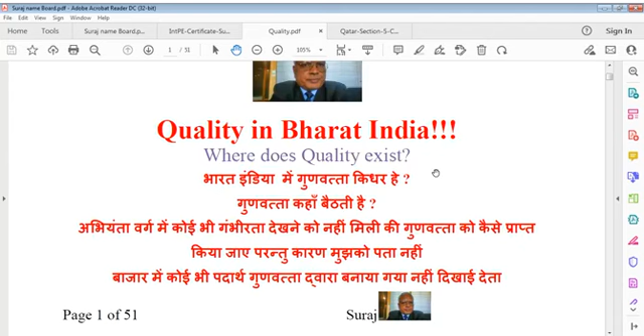There's only certification - you can say I'm certified when I certify my product, but even your certification doesn't have value because what you say doesn't work. Performance is more important in the engineering world, and if you don't perform, you are not suitable for this job.

We generally recruit you based on your interview or examination, and then we observe your performance. If performance comes up to the mark, then we will regularize you, or keep you on contract for just 1, 2, 3, or 4 months. This probation is required, and you have to pass through it.

Whatever times you join a job, you may change jobs, and even with experience, your performance is very important - that's the criteria that's fixed. If your performance is to be observed, the performance of the product is also to be observed. And that's why I say performance matters.

It may be personal performance - an officer's performance, a manager's performance, an MD's performance, an engineer's or doctor's performance. Whatever performance is required, that's very important. Same with product performance - if the product does not perform, that is shameful.

We only keep ourselves under the cover of warranty. I don't respect warranty if it's only for namesake or for the seller's own protection - that okay, you have 1 or 2 years warranty and I'll help you. If I help you, it's your responsibility to replace or repair it. Why should something fail without successful performance?

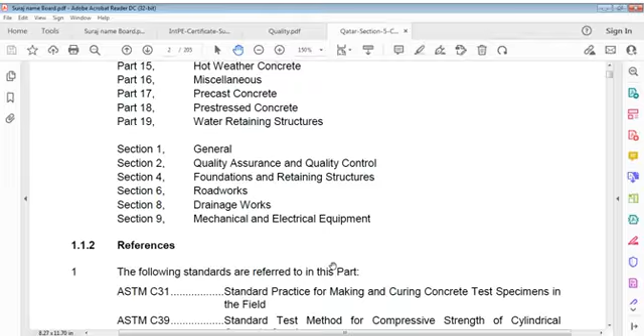Foundations and retaining structures, roadworks, drainage works, mechanical and electrical, includes requirements of concrete work for pipelines, roadworks, runways, structures. This is general, part 1 general. So likewise we can see section 1 is general, and then we have many references we have gone through, lots of references.

I will not go through scanning each page, but we can say if you scan through the whole document, you will find lots that we have gone through. It's not complete, it's just some references.

Now last time what I was interested in, I took many files from the internet to understand what we have to do, how we have to do concrete in certain weather conditions. That's a point where we have to understand clearly, because concrete is a very important item. It's such an important item that even very experienced people don't understand concrete sometimes.

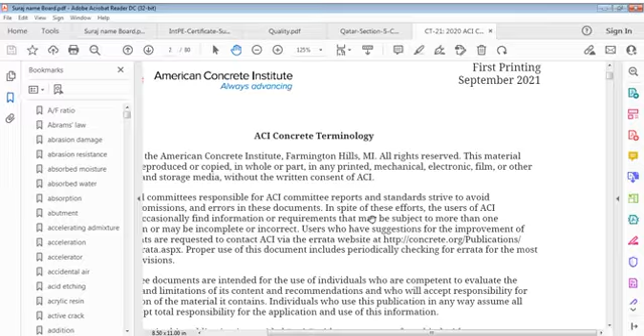Tries to avoid ambiguities, omissions and errors in these documents. In spite of these efforts, users of ACI documents occasionally find information or requirements that may be subject to more than one interpretation or may be incomplete or incorrect. Users who have suggestions for improvement of ACI documents are requested to contact ACI.

This is ACI committee material, just for information which I'm referring to, because I cannot hide something when I use this. So this is that file, on behalf of American Concrete Institute - American Concrete Institute Concrete Terminology, ACI CT21. In this, various definitions are given.

Abrams' law: a rule stating that with given concrete materials and conditions of test, ratio of amount of water to amount of cement in mixture determines strength of concrete, provided mixture is of a workable consistency. It's called water cement ratio, as we know, but it's the prime slide.

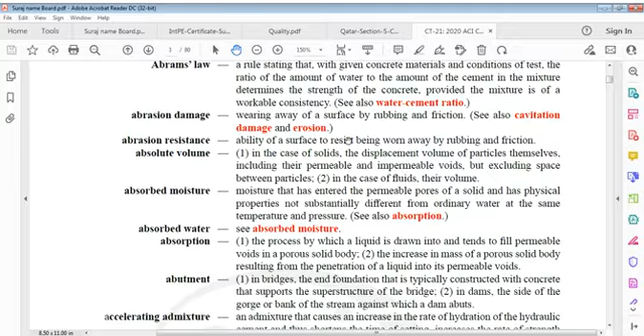Similarly, abrasion damage: wearing away of a surface by rubbing and friction, and it's called abrasion damage.

Same way, abrasion resistance - I'm just giving references, just to let you know what I have planned to talk about. Abrasion resistance is ability of a surface to resist being worn away by rubbing and friction.

So one was damage and one is resistance. Damage is, for example, wearing away of a surface by rubbing and friction, and resistance is the ability of a surface to resist being worn away by rubbing and friction.

Absolute volume: in case of solids, displacement volume of particles themselves, including their permeable and impermeable voids, but excluding space between particles. In case of fluids, their volume.

So likewise we have to know: absorbed moisture, absorbed water, absorption, accidental air, acid etching, acrylic resin, active crack, addition, adhesion, adhesives, and you can say adiabatic, admixture, adsorbed water.

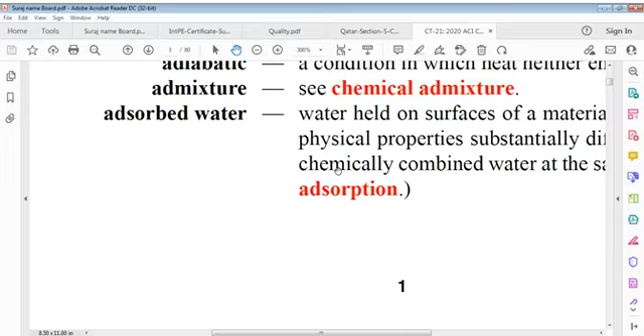Airlift, air meter, air ring, air separator, air voids, air blown mortar, air-cooled blast-furnace slag, air permeability test, air water jet, alignment, alkali, alkali reactivity of aggregate, alkali aggregate reaction, alkali carbonate rock reaction.

Alkali silica reaction, alkyl aryl sulfonate, allowable bearing capacity, allowable live load, allowable stress, alternative cement, alumina, aluminate cement, aluminate concrete, aluminous cement, amount of mixing, amplitude, anchor bolt.

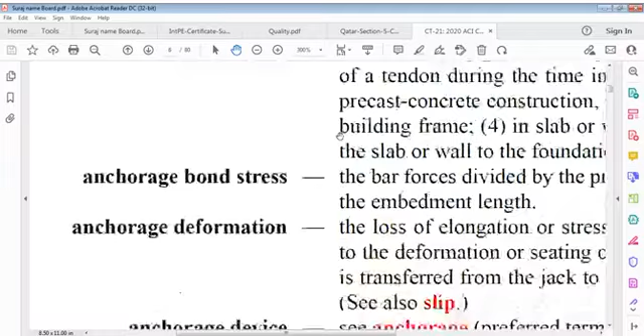Anchorage bond stress, anchorage deformation, anchorage devices, anchorage loss, anchorage slip, anchorage zone, angle of repose.

Calcium chloride, CaCl2, anti-washout mixture, apparent specific gravity, arc spectrography, architect engineer, architectural concrete, area of steel.

Arrhenius, argillaceous, arris, arrissing tool, artificial pozzolan, asbestos cement products, ashlar masonry, asphalt cement, asphaltic concrete, atmospheric pressure steam curing, autoclave curing, autoclave cycle.

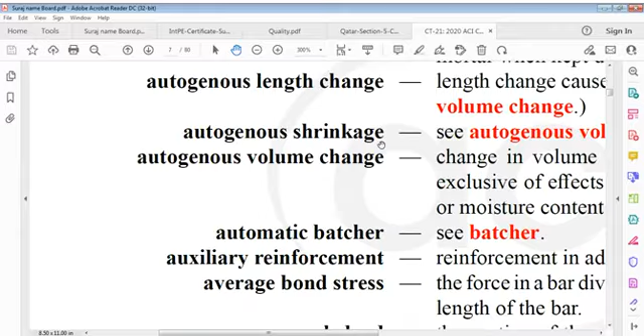Autoclave aerated concrete, autoclaving, autogenous healing, autogenous length change, autogenous shrinkage, autogenous volume change, automatic batcher, auxiliary reinforcement, average bond stress, axial load, axial steel reinforcement, back form, back plastering, backstay, backfill concrete.

Balanced moment, balanced reinforcement, ball mill, ball test, bar bender, bar mat, bar schedule, bar spacing, bar support, bar chair, barite, barrel of cement, base, base bead, base coat, base course, base plate, base screed, basic creep, basanite, batch mixer.

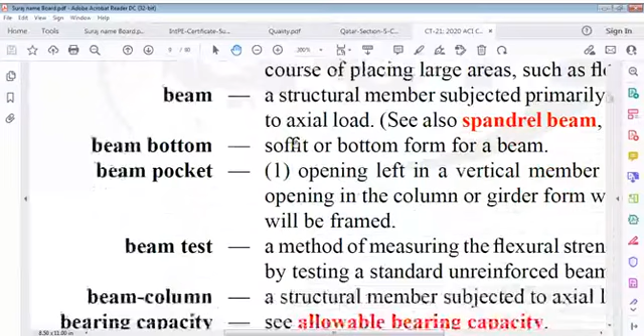Batch plant, batch weight, batch to water, batcher, batten, batter pile, bauxite, bay, beam bottom, beam pocket, beam test, beam column, bearing capacity, bearing stratum, belite, bend bar, bending moment, bending moment diagram, bending fractions, bentonite, billet.

Blaine apparatus, Blaine fineness, Blaine test, blast furnace slag, and likewise we have bleeding capacity, blast furnace.

Oh no, something has gone wrong. I'm sorry, I pressed the wrong button here. Sorry, something went wrong. Excuse me for that, I was on B.

So I came back to here. It's base course, basic plate, base screed, basic creep, basanite, batch mixer, batching plant, batch weight, batch washer, batchers, batten

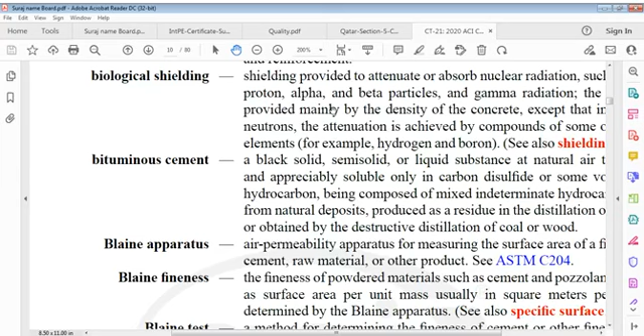Pile. So I came back here, and he says bentonite, billet, steel binary mixture binder, biological shielding, bituminous cement, Blaine apparatus, Blaine fineness, Blaine test, blast furnace slag, bleeding capacity, bleeding rate, blemish, blended cement, blinding

Bleeding rate, blemish, blended cement, blinding, blistering, block beam, block out, blow holes, blow pipes, blow up, board butt joint, bond sleeve, bond area, bond breaker, bond length, bond plaster, bond prevention, bond length, bond stress, bonded hollow wall masonry, bonded member

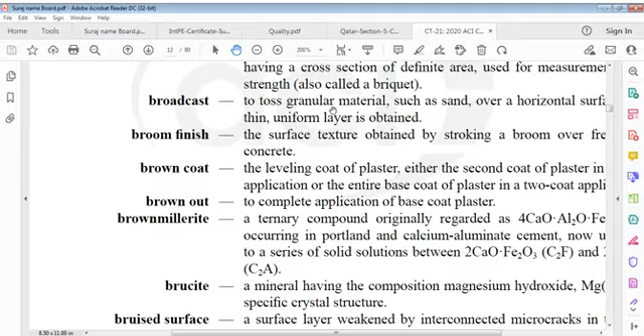Bonded post tensioning, bonded tendon, bonding agent, bonded member, bond with post tensioning, bonded tendon, bonding agent, bonding layer, bored pile, boring, boron pits, boron loaded concrete, box out bracing, bracket, bridge, brick seats, bridge deck, briquette, broadcast, broom finish, brown coat, brown out, brownmillerite

Bruised surface, buckling, bug holes, buggy, building official, build up, bulk cement, bulk density, bulk specific gravity, bulk head, bulking factor, bull float, bundle

Bush hammer, butt joint, buttress, butyl stearate, and cable, cage, cation, calcareous, calcite, calcium sulfo aluminate cement, very important point, calcium sulfo aluminate cement, calcium chloride solution, calcium hydroxide, calcium stearate, calcium aluminate cement, calcium silicate brick, calcium silicate hydrate, calation, California bearing ratio, calorimeter

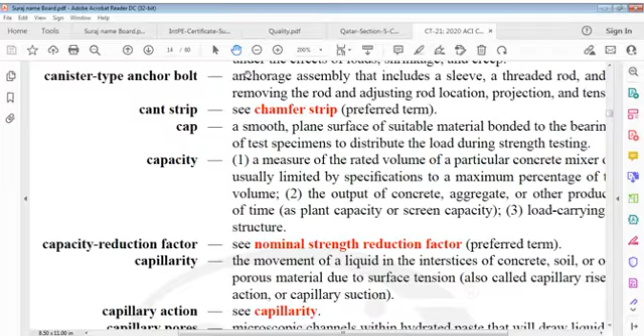Camber, canister type anchor bolt, cant strip cap, capacity reduction factor, capillary action, capillary pores, capillary rise, capillary suction, carbon black, carbonation shrinkage, cast stone, castable refractory, cast in place concrete, cast in situ

Cathode, cathodic protection, caulk, cavitation damage, celite, and we can say cast in situ, cathode, cathodic protection, caulk, cavitation damage, celite, cellular concrete, cellular construction

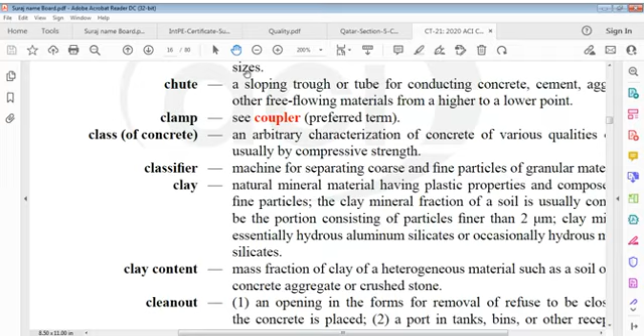Cementitious material, cementitious mixture, centering, central mixer, central mixed concrete, centrifugal process, centrifugally cast concrete, ceramic bond, chair, chalk, chalking, chamfer strip, charge, checking, chemical admixture, chemical attack of concrete, chemical bond, chemically pre-stressing cement, chaff, chipping, chips, chute, clamp, class of concrete, classifier, clay content, clean out, clean up, cleat, climbing form

Clinker, check clip, coarse aggregate factor, cleat, climbing form, kicker, coarse factor, and then coarse grained soil, coated bar, coating, cobble stone, coefficient of permeability to water, coefficient of subgrade friction, coefficient of subgrade reaction, coefficient of thermal expansion, coefficient of variation, cold joint, then cold strength, cold weather, cold drawn wire reinforcement, and you can say cold joint lines

Cold joint steel reinforcement, colemanite, collated fiber, colloidal grout, colloidal mixer. Then you can say cold joint lines, colloidal mixer, and then you have color hardener, colorimetric

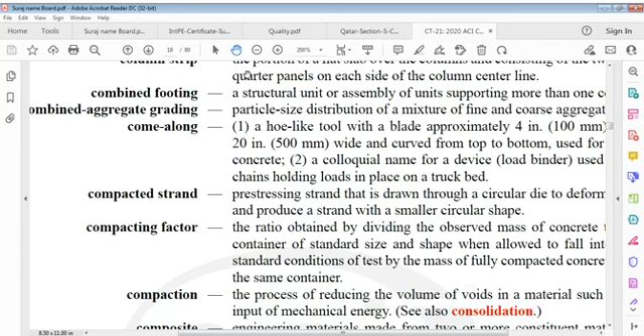Value, column capital, column clamp, column side, column strip, combined footing, combined aggregate grading, come along, compacted strand, compacting factor, compaction, composite column, concrete flexure member, composite construction, composite

It is composite concrete flexural member, that is composite construction, composite pile, composite sample, compression member, compression reinforcement, compression test, concentric tendons, concordant tendon, concrete block, concrete breakout failure, and you can say concrete brick, concrete cart, concrete compressive strength

Concrete containment structure, concrete cover, concrete finishing machine, and you can say here is also concrete die, which concrete die, concrete finishing machine, concrete flat work, concrete masonry unit, CMU we call it, concrete paver, concrete pile, concrete producer, and we can say here concrete pry-out strength, concrete pump, concrete reactor vessel, concrete spreader, concrete strength, concrete vibrating machine, condensed silica fumes

Cone bolt, confined concrete, confined region, consistency factor, consistometer, consolidation, consistency factor, and we can say consistometer

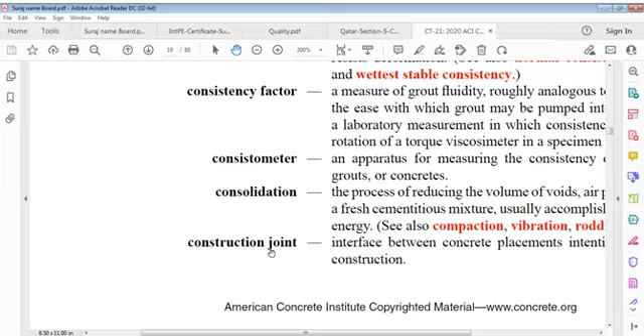Consolidation, construction joint, and also we can say here, let me check, it's yes, working, still working. So consolidation, construction joint, there is

Construction loads, contact ceiling, contact pressure, contact splice, containment structures, continuous beam, continuous grading, continuous mixer, continuous mixing, continuous sampling, continuous slab beam, continuously reinforced pavement, contract documents, contraction joint

Grouting, contractor, control joints, and you can say conveying hose, conveyor, coping, corbel

Core, and you can say core beam, coring, corner reinforcement, corrosion inhibitor, cotton mats, coupler, coupling agent, coupling sleeve, course, crack, crack control reinforcement, cracked section

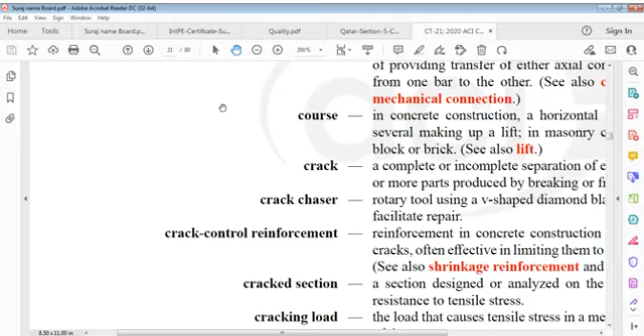Cracked section, and you can say cracking load, cracks, crazing, creep, critical saturation, cross bracing, cross section, and we can say cross plate, crushed gravel, crushed stone, crusher run aggregate, cube strength

Cumulative batching, curing agent, curing blanket, curing compound, curing cycle, curing delay, curing kiln, curing membrane, curling, curtain grouting, curvature friction, cutting screed, cuttings, and we can say here cylinder strength, damage, dampproofing

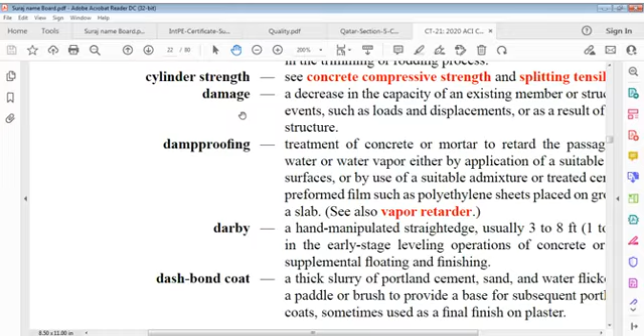Dash-bond coat, darby, D-cracking, dead-end anchorage, dead man, debonding, decentering, decking, decorating concrete, deflected tendons, deflection, deformation, deformed bar, deformed reinforcement, deformed tie bar, dehydration, deicer.

Delamination, delayed ettringite formation, delivery hose, demold, demold dense graded aggregate, and densifier.

Density dry, density control, design bearing pressure, design load, design strength, detailing, deterioration, development bond length, bond stress, development length, devil's float, diagonal cracking, diagonal tension, diametral compression test.

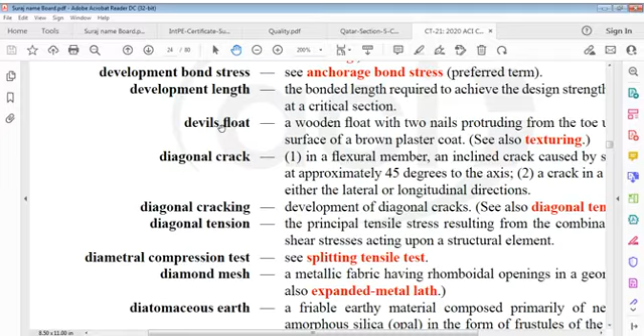Diamond mesh, diatomaceous earth, dicalcium silicate, differential thermal analysis, diffusion, dilation, direct dumping, discoloration.

Disintegration, dispersing agent, distortion, distress, distribution bar reinforcement, D-line cracks.

Dome, dormant crack, double T-beam, double up, dowel rod, double bar reinforcement, drainage fill, drape tendon, dryer, drilled pier, drilled pile, drilled caisson, drip, drop panel.

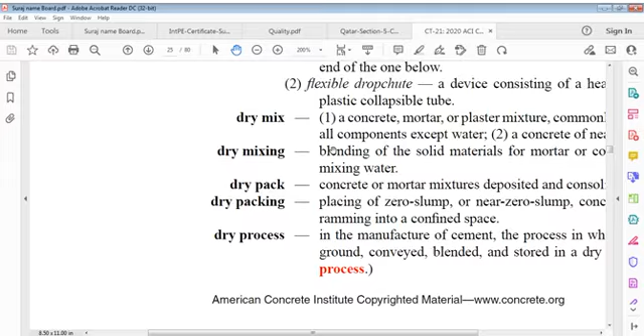Drop chute, dry mix, dry mixing, dry pack, dry packing, dry process, dry rodding, dry topping.

Dry batch weight, dry cast process, dry mix shotcrete, dry packed concrete, dry rodded density, dry rodded volume, dry rodded weight, dry shake, dry-tamp process.

Drying creep, drying shrinkage, ductility, Dunagan analysis, durability.

Durability factor, dust of fracture in aggregate, dusting, dynamic analysis, dynamic load, dynamic loading, dynamic modulus of elasticity.

Early age of concrete, early stiffening, early strength, early entry dry cut saw, dynamic.

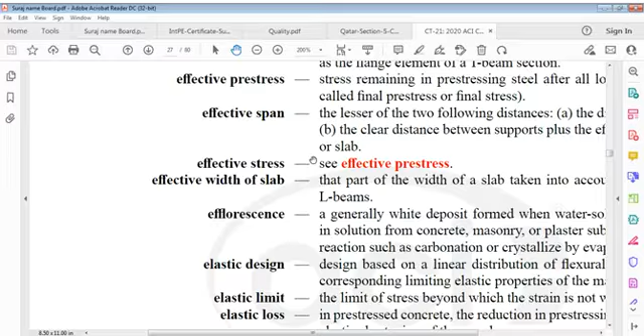Eccentric tendon, edge beam, edge form, edge reinforcement, edging, effective area of concrete, effective depth of section, effective flange width, effective prestress, effective span, effective stress, effective width of slab, elastic design, elastic limit, elastic loss.

Elastic shortening, elasticity, electrical curing, electrolysis.

Electrolyte, elephant trunk, elongated piece of aggregate, elongation, emulsion, enclosure wall.

Encrustation, end anchorage, end block, end bearing pile, endothermic reaction, engineered cementitious composite.

Entrained air, entrapped air, environmental engineering concrete structures, epoxy concrete.

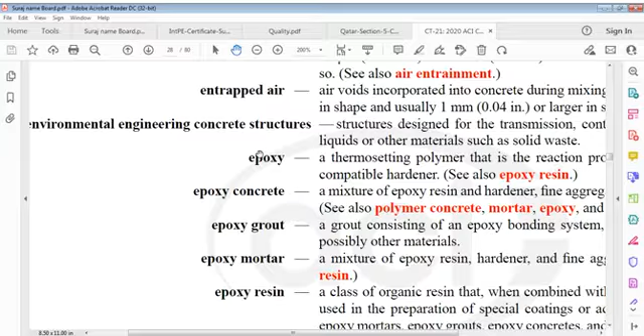Epoxy concrete, epoxy grout, epoxy mortar, epoxy resin, epoxy coated bar, equilibrium density, equivalent embedment length, equivalent fiber diameter, equivalent rectangular stress distribution, erosion, ettringite.

Evaporable water, evaporation reducer, evaporation retardant, exfoliation, exothermic reaction, expanded blast furnace slag, expanded shale, clay or slate.

Expanded metal fabric reinforcement, expanded metal lath, expansion joint.

Expansion sleeve, expansive cement, expansive component, exposed aggregate finish, exposure class, extender, extensibility, exterior panel, external vibrator, extreme compression fiber, extreme tension fiber, exudation, fabric.

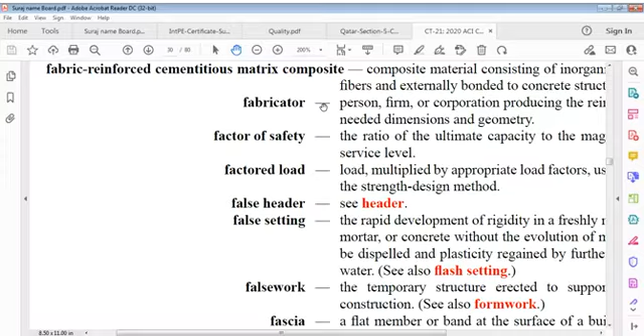Factor of safety, factored load, false header, false setting, false work, fascia.

Fastener, fatigue, fatigue failure, fatigue strength, faulting, feather edge, feed wheel, ferro cement, fiber aspect ratio, fiber count, fiber reinforced concrete, fiber reinforced polymer, field bending, field concrete, field cured cylinder.

Field proportioned grout, fillet fin, final curing, final prestress, final setting time, final stress, fine aggregate, fine grained soil.

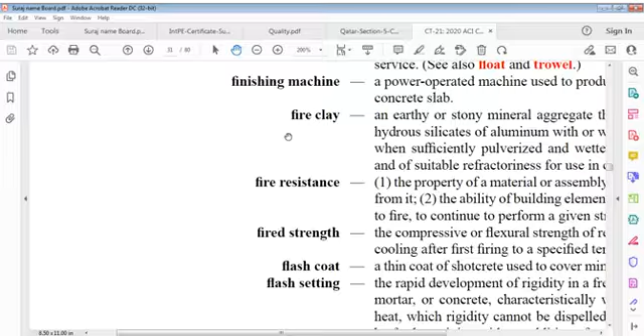Finishing grinding, finish screed, finishing, finishing machine, fire clay, fire resistance, fired strength, flash coat, flash setting, flashing, flat jack.

Flat piece of aggregate, flat plate, flat slab, flexible pavement, flexural bond stress, flexural rigidity, flexural strength, flint.

Float finish, floating, flow, flow cone, flow line, flow table, flow trough, flowable consistency, flowing concrete, fluid consistency, fluidifier.

Fly ash, flying form, foamed concrete, fog curing, fog room, folded plate, footing, form anchor, form coating, form hanger, form insulation, form lining, form oil, form pressure, form release agent.

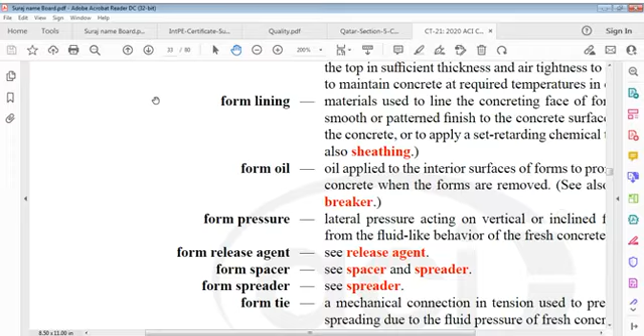Form spacer, form spreader, form tie, formwork engineer, formwork contractor, formwork tie.

Foundation bolt, fracture, free fall, free lime, free moisture, free water, fresh concrete, Fresno trowel, friction loss, friction pile, frog, Fuller curve, Fuller Thompson ideal grading curve, furring.

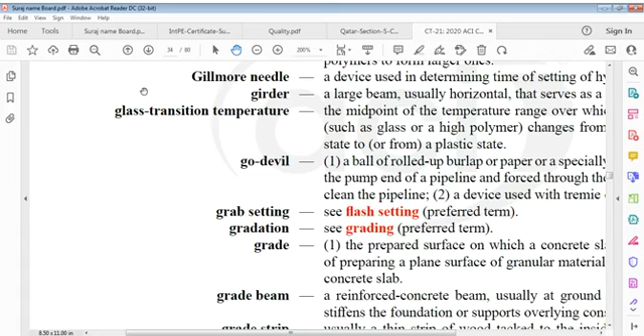Geopolymerization, Gillmore needle, girder, glass transition temperature, go devil, grab setting, gradation, grade beam.

Grade strip, graded standard sand, gradient, grading curve, granolithic concrete, granolithic finish, granulated blast furnace slag, gravel, green concrete, grid foundation.

Grinding, grinding aids.

Grinding medium, grizzly, grog, groove joint, groover, ground wire, ground granulated blast furnace slag.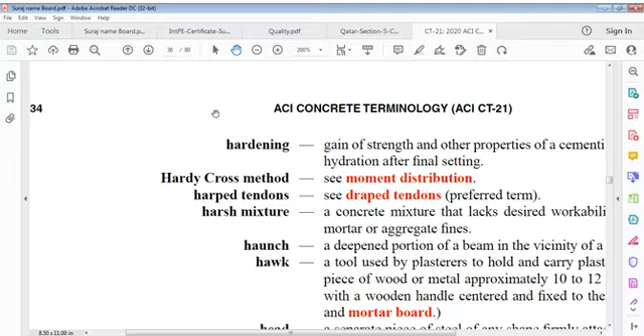Hard burnt lime, hardened concrete, hardener, hardening, Hardy Cross method, harped tendon, harsh mixture, haunch, hawk.

Haunch, hawk, head anchorage capacity, head bearing area, headed bar, header, heat of hydration, heat of solution, heat deflection temperature, heating rate, heavy concrete, heavy media separation, heavy weight aggregate, heavy weight concrete, helical reinforcement, hematite, hemihydrate, hesitation setting, Hessian, high alumina cement, high density concrete, high discharge mixer, high early strength cement.

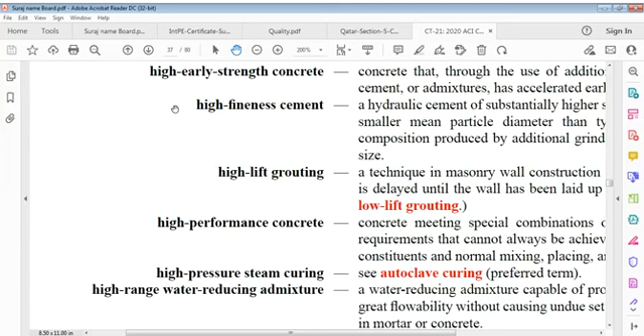High early strength concrete, high fineness cement, high lift grouting, high performance concrete, high pressure steam curing, high range water reducing admixture, high strength water reducing admixture, high strength concrete, high strength reinforcement, high strength steel, high temperature steam curing, hard hold down bolts, hollow unit masonry, honeycombing.

Honeycomb, Hooke's law, hook bars, hoop reinforcement, horizontal shoring, horizontal shaft mixer, hot cement, hot face, hot load test, hydrated lime, hydration, hydraulic cement.

Hydraulic cement concrete structure, hydraulic hydrated lime, hydraulic cement grout, hydromix nozzle, hydrous calcium chloride, CaCl2, 2H2O, ignition loss, ilmenite, impact hammer, impending slough, inclined axis mixer, incrustation, indented wire.

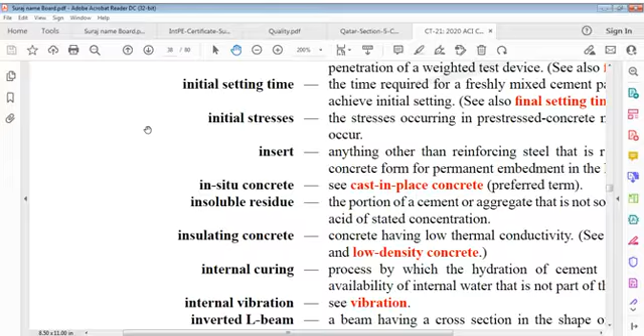Initial curing, initial prestress, initial setting time, initial stresses, insert, in situ concrete, insoluble residue, insulating concrete, internal curing, internal vibration, inverted L beam, inverted T beam, I section, isolation joint.

Jacking device, jacking force, jacking stress, jaw crusher, jitterbug, joint filler, joint sealant, joint spall, jointed detail, jointer, concrete jointing, joint sealing compound, joist, kaolinite.

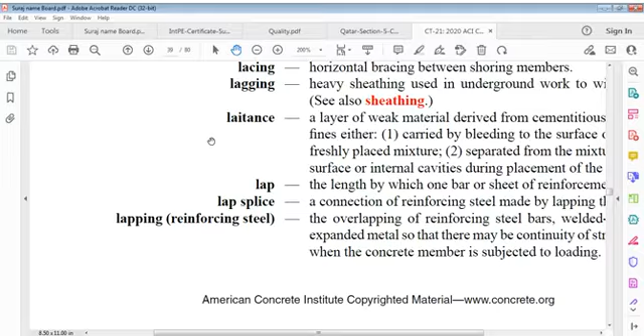Laitance, lap, lap splice, lapping reinforcing steel, lateral reinforcement, latex, layer, L-beam, leaf, lean concrete, lean mixture, leacher, length change, lever arm, licensed design professional, lift joint, lift slab.

Lightweight aggregate, lightweight concrete, limestone, limit design, limonite, linear transformation, linear traverse method.

Lining, lintel, live load, load balancing, load factor, load bearing wall, long column, longitudinal bar, longitudinal crack, longitudinal joint, longitudinal reinforcement, Los Angeles abrasion test, loss of...

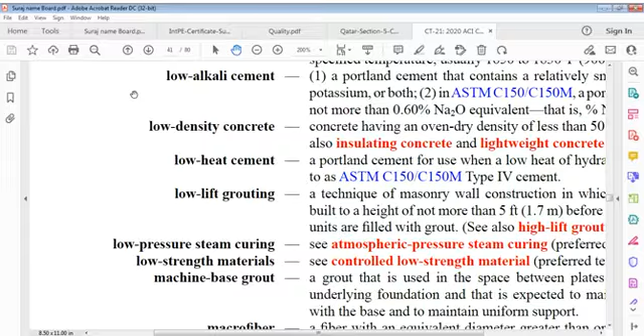Low density concrete, low heat cement, low lift grouting, low pressure steam curing, low strength material, machine base grout, macro fiber, macroscopic - visible to the naked eye.

Magnetite, manual batcher, manufactured sand, map cracking, marble, masonry, masonry cement, masonry grout, masonry lift, mass concrete, mass density, mat.

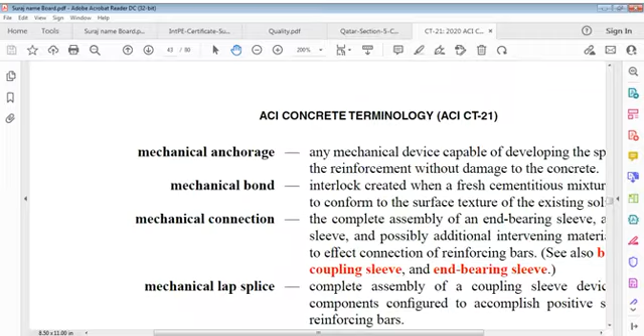Mat foundation, material hose, matrix, maturity factor, maximum size of aggregate, mean stress, mechanical anchorage, mechanical bond, mechanical connection, mechanical lap splice, megascopic.

Melilite, melt, membrane curing, membrane theory, merwinite, mesh reinforcement, mesh roller, Mesnager hinge, metakaolin.

Micro concrete, micro cracking, micro crack, microfiber, microscopic, microsilica, micro topping, middle strip, mill scale, mineral aggregate, mineral filler.

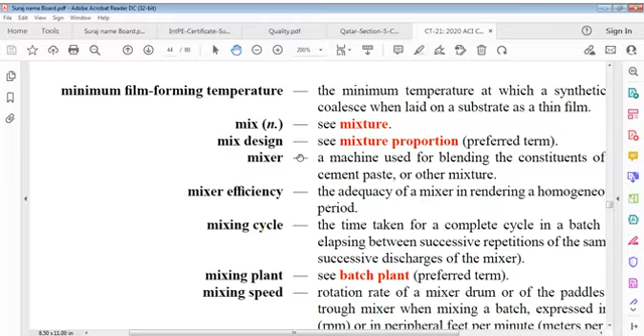Mixer efficiency, mixing cycle, mixing plant, mixing speed, mixing time, mixing water, mixture proportions, mobile placer, mobility, moderate exposure condition, moderate sulfate resisting cement, modified cube, modified Portland cement, modular ratio, modulus of resilience.

Moist cabinet, moist room, moisture barrier, moisture content of aggregate, moisture free mold, moment distribution, monolithic concrete, monolithic surface treatment, monolithic topping, monomolecular, montmorillonite.

Mortar board, mortar flow, mosaic, mottling, moving forms, mud mat, mud pumping, mud jacking, multi-element processing, nailer, natural cement.

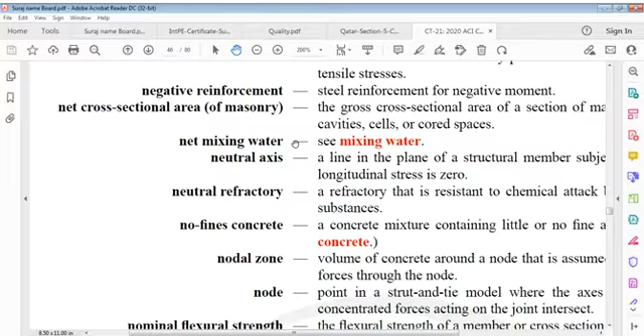Natural pozzolana, natural sand, neat cement grout, neat cement paste, neat plaster, negative moment, negative reinforcement, net cross-sectional area of masonry, net mixing water, neutral axis, neutral refractory, no fines concrete, nodal zone, node, nominal flexural strength, nominal maximum size of aggregate.

Nominal shear strength, nominal size, nominal strength reduction factor, non-agitating unit, non-air-entrained concrete, non-bearing wall, non-combustible, non-evaporable water, non-ferrous, non-prestressed reinforcement, non-recoverable creep, non-tilting mixture.

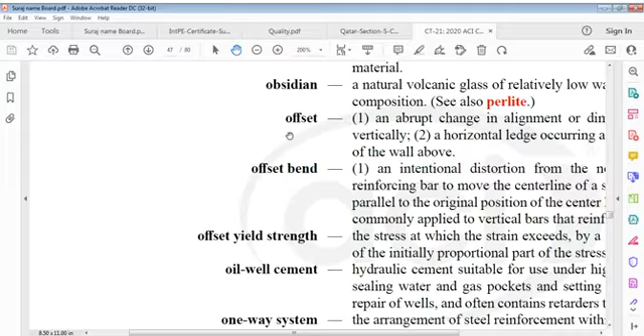Non-volatile content, normal cement, normal consistency, normal Portland cement, normal stress, normal weight aggregate, normal weight concrete, no slump concrete, nozzle liner, nozzle velocity, nozzle band, obsidian, offset bend, offset yield strength, oil well cement, one way system, opaline chert.

Open graded aggregate, open top mixer, ordinary Portland cement, orthotropic, owner's representative, oven dry specific gravity, overlay, over sanded, over spray, over vibration, owner, pack setting, package concrete mortar or grout packerhead process, paddle mixer, pan mixer.

Panel strip, paraffin patch, partial prestressing, particle shape, particle size distribution, parting agent, pass, paste content, paste volume, pattern cracking, pattern cracks, pattern ashlar, pavement concrete, paving train.

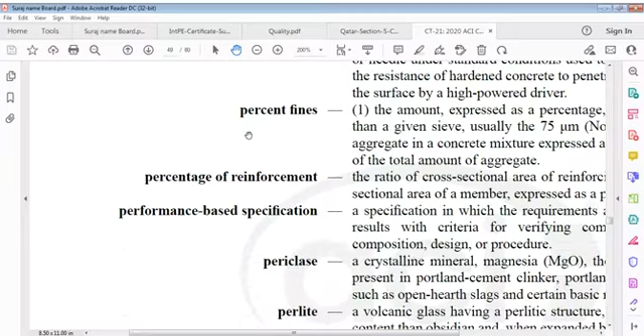pea gravel, peak load strength, pedestal, peeling, pencil rod, penetration probe, penetration resistance, percent fines, percentage of reinforcement, performance-based application specification, performance-based specification, periclase, perlite, permanent setting, permeability, pervious coat concrete.

Plaster of Paris, plastics, plastic cement, plastic consistency, plastic hinge, plastic flow, plastic shrinkage, plasticity index PI, plasticizer, plastic shrinkage crack, plumb, pneumatically applied mortar, point count method.

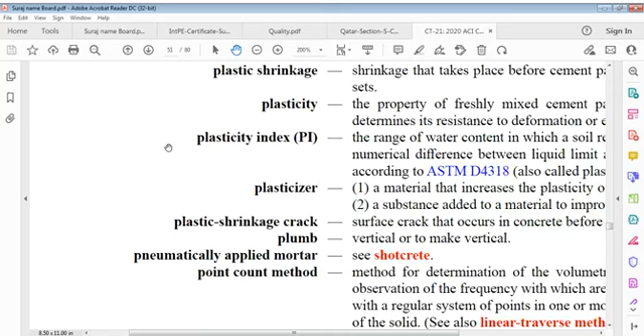Modified, point load, point of counterflexure, point of reinflection, point of counterflexure, point of inflection, Poisson ratio, polarizing microscope, polish or final grind, polished concrete, and polyethylene and polymer concrete, polymer cement concrete, polymer impregnated concrete, polymerization, polystyrene resin, polyurethane, polyvinyl chloride, ponding, popout, porosity, Portland blast furnace

Slag cement, portland-cement clinker, Portland cement concrete, Portland, pozzolana cement, position coupler, positive moment, positive reinforcement

Pozzolana, pozzolanic reaction, pozzolanic activity index

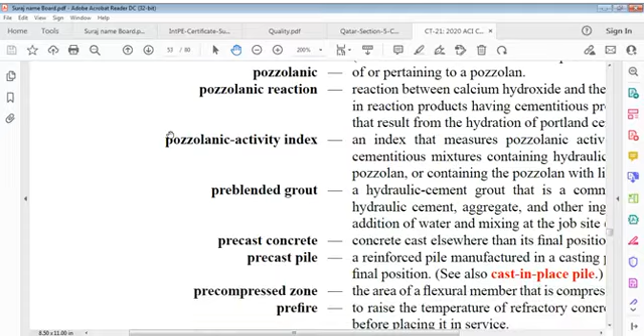Pre-blended grout, precast concrete, precast pile, pre-compressed zone, pre-fire, preformed foam, pre-mature stiffening, pre-placed aggregate concrete, pre-post tensing, preservation, preset period, pre-shrunk concrete, mortar grout, pressed edge, pre-steaming period, pre-stress concrete, pre-stressing steel, pre-tensioning load, pre-tensioning concrete, pre-stressing steel, pre-tensioning of bench

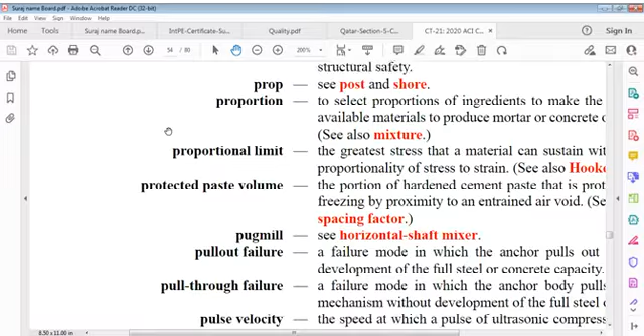Primary crusher, principal planes, principal stress, probable flexural strength, probabilistic design, proportion, proportional limit, protected paste volume, pug mill, pull-out failure, pull-through failure, pulse velocity, pulverized fuel ash

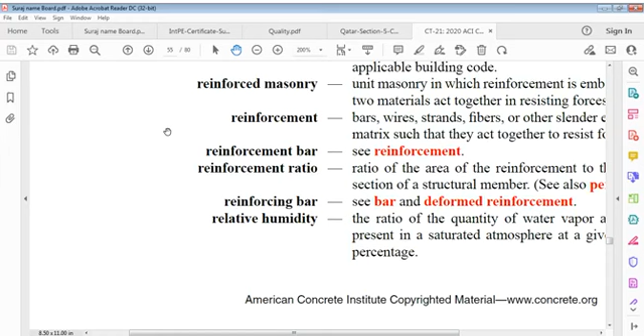Refractory aggregate, refractory concrete, refractory insulating concrete, regulated set cement, rehabilitation, reinforced concrete, reinforced masonry, reinforcing bar, reinforcement ratio, reinforcing bar, relative humidity, and we have release agent

Remoldability, remolding test, render, repair. We have repeatability, reproducibility, required average strength

Resetting of forms, reshore, residual deformation, residual strength, resilience, resin, and we have resin concrete, resin mortar, restoration, restraint of concrete, retardation, retarder, retarding admixture, retemper, reveal, revibration

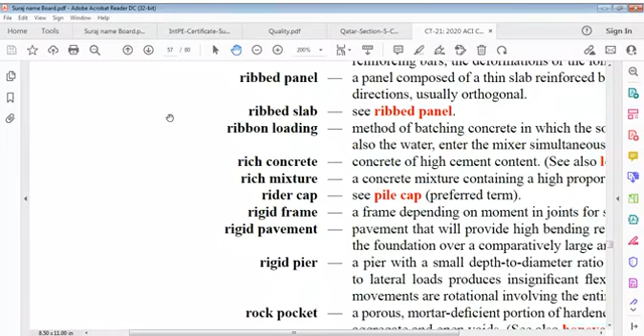Ribbed slab, ribbon loading, rich concrete, rich mixture, rider, rider cap, rigid frame, rigid pavement, rigid pier, rock pocket, rod, and we have rodding, roller compaction, roller compacted concrete, rotary float, rotary kiln, route, rubbed finish, rubber setting, rubbing brick

Rubble, rupture modulus, rupture strength, rustication strip, R value, sag, sack rub, sagging sample, we have sampling plan

Sand equivalent, sand pocket, sand streak, sand lime brick, sandstone, sandwich panel, Santorin earth, saponification, saturated surface dry

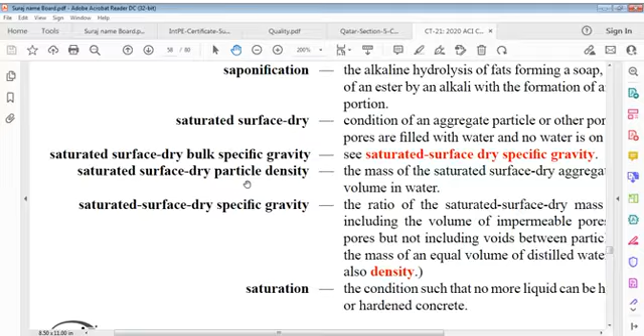Scratch coat, screed, screed guide, screed rails, screed wire, screeding, screed, sealant, sealer, sealing compound, seating, secondary crusher, segmental construction, segregation

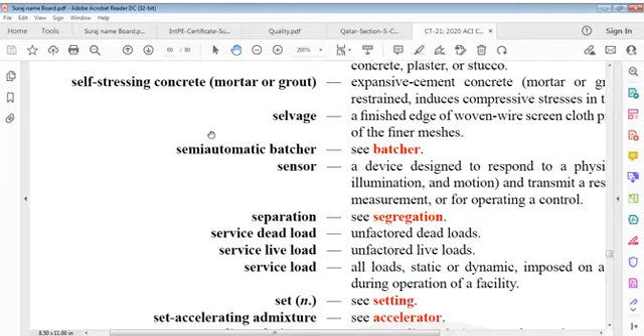Self-consolidating concrete, and we have self-desiccation, self-furring, self-stressing concrete mortar or grout, selvage, semi-automatic batcher, sensor, separation, service dead load, service live load, service load

Then set accelerating admixture, set retarding admixture, setting, and we have setting time, settlement, settling, severe exposure condition, shale, sharp sand, she bolt, shear, shear cap, shear reinforcement, shear strength, shear stress, shear head, shear wall and sheath

Sheathing, sheath pile, sheathing, shelf angles, shielding concrete, shim, shooting, shore, shoring, shoring layout, short column, shorten, shotcrete, rebound, shoulder, shrinkage, shrinkage crack, shrinkage cracking, shrinkage loss, shrinkage reinforcement, shrinkage compensating

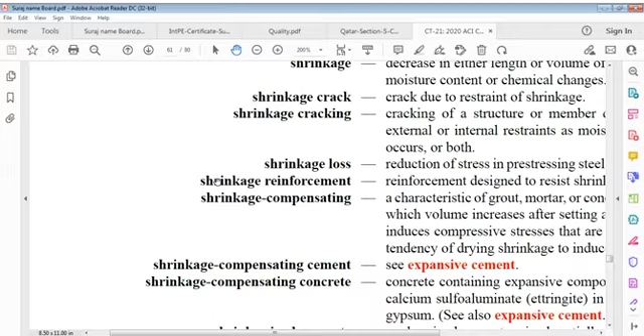We have shrinkage compensating cement, shrinkage compensating concrete, shrinkage mixed concrete, shrink mixed concrete, SI System International, side face blowout failure, and sieve

Analysis, sieve fraction, sieve number, sieve size, significant, silica flour, silica fume, silica powder, silicate. And then we have here siliceous aggregate concrete, silicone, silt, simple beam, single sized aggregate, sintering, skid resistance

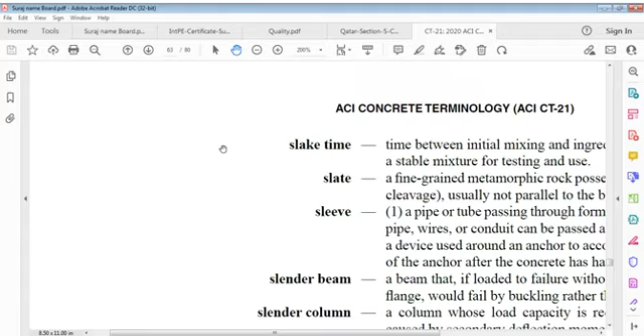Slab bolster, slab strip, slab jacking, slab on ground, slag, slag cement, slag activity index, slake time, slat, slate, sleeve, slender beam, slender column, slenderness ratio

Slick line, sliding form, slip form, slope footing, sloughing, slugging, slump cone, slump loss, slurry, smack tight, snap tie, snow load, soffit, soil, soil cement, soil pressure, soil stabilization, solid masonry unit, solid

Span length, span depth ratio, spandrel beam, spatter dash

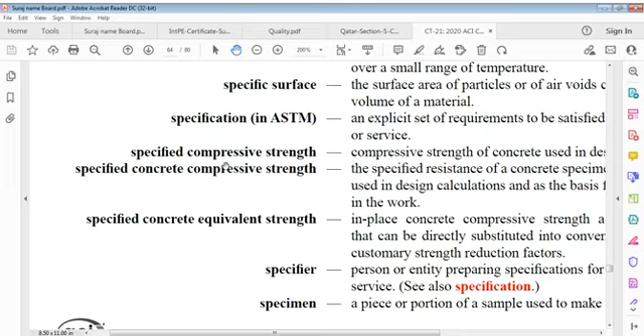Specialty structural engineer, specific gravity, gravity factor, then specific heat, specific surface, specification in ASTM, specified compressive strength, specified concrete compressive strength, specified concrete equivalent strength, specifier

Specimen, then we have spinning, spiral test, standard hook, standard hooked bar, standard sand, standard time temperature curve, static load

We have static modulus of elasticity, stationary hopper, steam curing, stearic acid, steel sheet, steel trowel, stencil patterned concrete, stepped footing, sticky cement, stiffback, stiffness, stirrup

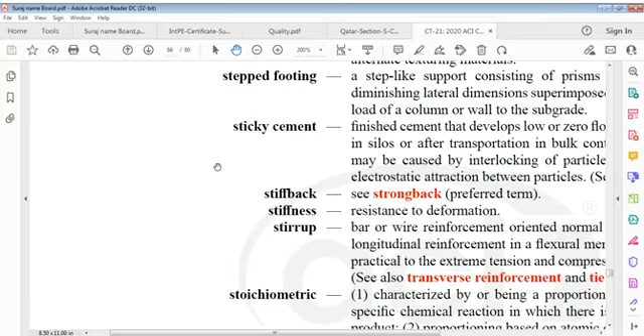Stoichiometric, stone sand, storage hopper, straight edge, straight line theory

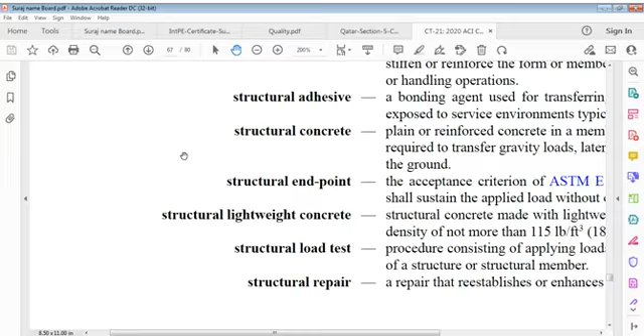Design method, stress corrosion, stress relaxation, stress, structural endpoint, structural lightweight concrete, structural load test, structural repair, structural sandwich construction

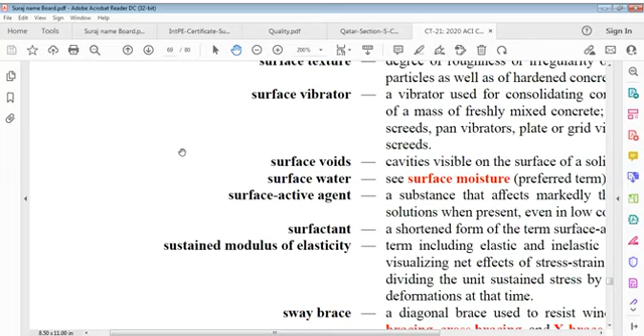Sulfate resistant cement, sulfo-aluminate cement, superimposed load, superplasticizer, superstructure, supersulfated cement, supplementary cementitious materials, surface active, surface air voids, surface area, surface bonding of masonry, surface moisture, surface retarder, surface air voids, surface area, surface bonding of masonry, surface moisture, surface retarder, surface tension, surface texture, surface vibrator, surface voids, surface water, surface active agents, surfactant, surface void, surface water, surface active agent, surfactant, sustained modulus.

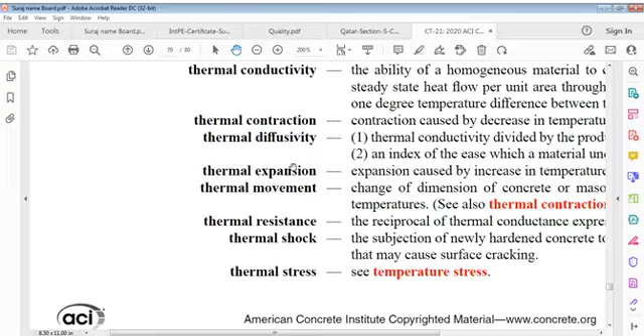Tie bar, tie rod, tie back, tied column, tilting mixer, tilt up, time of haul, time of setting, time dependent deformation, Tobermorite gel, tolerance, tongue and groove, tooling, top form, topping, torque, viscometer, torsional stress, toughness, transfer, transfer bond, transfer length, transfer strength, transit mixer, transit mixed concrete, translucent concrete, transmission length, transverse crack, transverse joint, transverse prestress, transverse wire reinforcement, transverse strength, trap rock.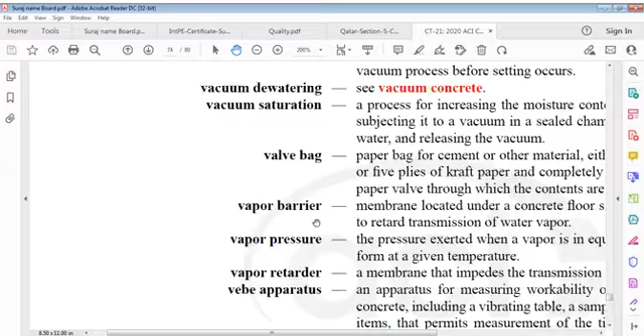Vacuum bag, valve bag, vapor barrier, Vebe apparatus, vehicle, Vinsol resin, vermiculite, vertical shaft mixer, vibrated concrete, vibration, vibration limit, vibrator, Vicat apparatus, Vicat needle.

Viscometer, viscosity, visual concrete, void cement ratio, volatile material, volume batching, volume change, volumetric measuring, volumetric mixer, water cement ratio, then we see waffle, Wagner fineness, wale.

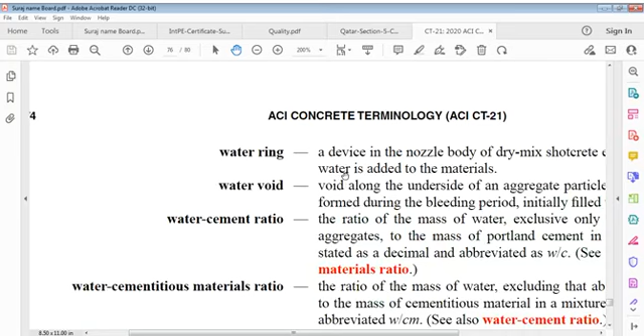Wall form, water, warehouse bag, warehouse setting, warping, warping joint.

Waterproof cement, waterproofing compound, water reducing admixture, water repellent, water resistant, water stop, watertight, wearing course, weathering, web bar, web reinforcement.

Wedge anchorage, weigh batching, welded butt splice, welded wire fabric, weld wire reinforcement, welding, well graded aggregate, wet process, wet screening.

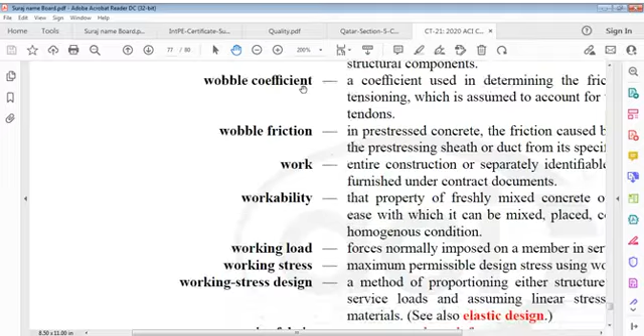Wrapping, woven wire fabric, woven wire reinforcement. Again, I say working load, working stress design, woven wire fabric, woven wire reinforcement, wrapping.

Yield, zero slump concrete.

And I think this is again the committee's introduction, you can say, and that's all we did today in this talk.

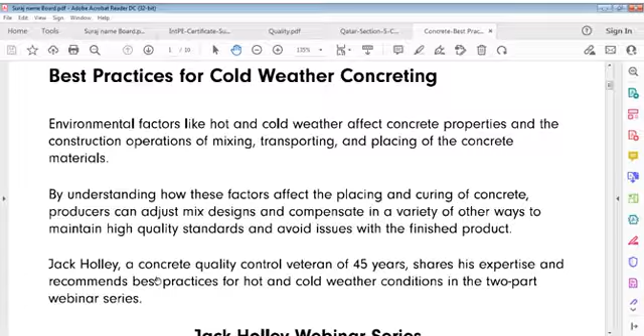Environmental factors like hot and cold weather affect concrete properties, placing, and curing of concrete. Producers can adjust mix designs and compensate in a variety of other ways to maintain high quality standards and avoid issues with the finished product. A concrete quality control veteran, Jack Holley, shares experience and comments on best practices for hot and cold weather conditions in two parts.

This is a simple definition we did yesterday also. ACI, the American Concrete Institute, defines cold weather concreting as a period when average daily ambient temperature remains below or is expected to fall below 5 degrees Celsius - I am not speaking Fahrenheit, 5 degrees Celsius - for more than 3 successive days. Average daily temperature is the average of the highest and lowest temperature during the period from midnight to midnight.

When temperatures above 10 degrees Celsius occur during more than half of the day, for any 24 hour duration, the period shall no longer be regarded as cold weather. Cold weather concreting is when average daily ambient temperature is below 5 degrees Celsius for more than 3 successive days.

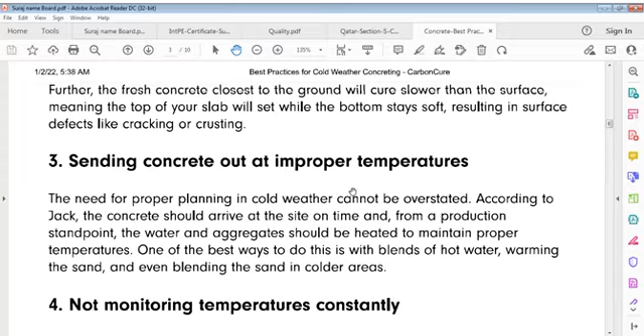Common mistakes which we do: number one, letting concrete freeze, that's a mistake. Then we have sending concrete out at improper temperature, not monitoring temperature constantly, and improper placing and finishing.

Mixed design adjustment in cold weather that we have to do: we have reduced supplementary cementitious materials (SCM) and adjust admixtures, use accelerators, and you can say carbon cure and cold weather. So let's go back and see these conditions where we say don't do that, and here's what we say, in fact.

So we have understood what cold weather concrete is: average temperature below 5 degrees Celsius, to be very frank, for 3 days. Then what happens? Letting concrete freeze - that's a mistake we make, letting concrete finish improperly.

Concrete temperatures should be maintained between, you can say, 10 degrees Celsius until expected strengths have been reached after the finishing process.

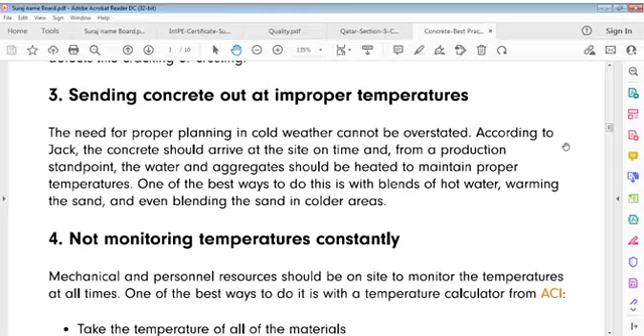Water and aggregates should be heated to maintain proper temperatures. One of the best ways to do this is with blends of hot water, warming sand, and even blending of sand in colder areas.

Not monitoring temperature constantly is a problem. Mechanical and personnel resources should be on site to monitor temperatures at all times. One best way to do it is with a temperature calculator from ACI. Take the temperature of all materials.

Calculate the output temperature of concrete, target water temperatures, and make other adjustments. There are temperature sensors available.

Target water temperatures and make other adjustments. There are temperature sensors available today that can be easily installed in concrete as it is placed. These sensors can send data wirelessly so you can monitor and foresee potential issues or changes in set time.

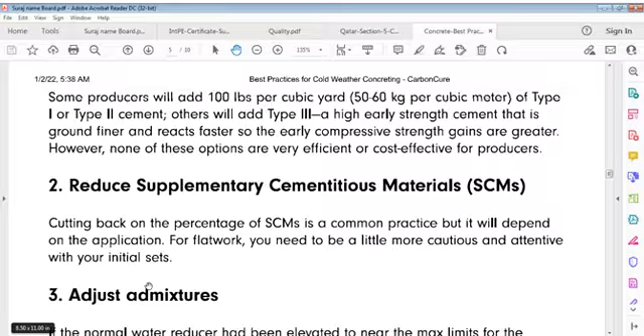It will depend on application. For flat work, you need to be more cautious and attentive with your initial sets. If normal water reducers had been elevated to near maximum limits for summer months, they should be moved back.

Decreasing the amount of water reducing retarder is another common adjustment. However, you don't want to decrease water reducing retarder past the point of moderate reduction, or you start to have workability problems.

There are only two types of accelerators: chloride based and non-chloride based. Chloride based accelerators are best, but they are limited due to corrosion potential of reinforcing steel. Non-chloride accelerators work well if manufacturers' recommendations for doses are followed.

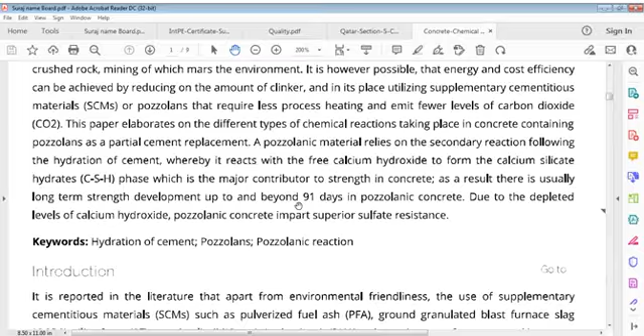As a result, there is usually long-term strength development up to and beyond 91 days in pozzolanic concrete. Due to depleted levels of calcium hydroxide, pozzolanic concrete imparts superior sulfate resistance.

It's reported in literature that apart from environmental friendliness, use of supplementary materials such as pulverized fuel ash, ground granulated blast furnace slag (GGBS), silica fumes (SF), metakaolin (MK), and rice husk ash (RHA) reduces the cost of concrete and improves the properties and durability of hardened concrete, thereby enhancing the service life of the structure. That's what it is, and we'll discuss about this.

Cement is deemed to have a considerable high carbon footprint, contributing immensely to global anthropogenic carbon dioxide. Climate change is purported to be a phenomenon that can bring about a rise in global temperature due to the presence of excessive carbon dioxide in the atmosphere, and is cumulative and irreversible over time scales of centuries.

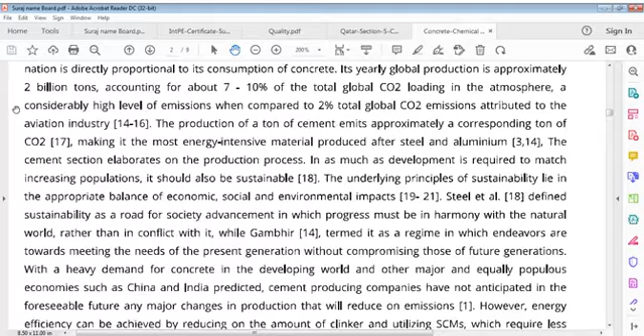We can say it's a considerable high level of emissions when compared to the 2% of total global emissions attributed to the aviation industry. Production of a ton of cement emits approximately a corresponding ton of carbon dioxide, making it one of the most energy intensive materials produced, after steel and aluminium.

This section elaborates on the production process, as much as development is required to match increasing populations, which also must be sustainable. The underlying principles of sustainability lie in an appropriate balance of economic, social, and environmental impacts. It is defined as the road for society's development in which progress must be in harmony with the natural world rather than in conflict with it, while Gambhir termed it as a regime in which endeavors are towards meeting the needs of the present generation without compromising those of future generations.

With a heavy demand for concrete in the developing world and other major, equally populous economies such as China and India, cement producing companies have not anticipated, in the foreseeable future, any major changes in production that reduce emissions. However, energy efficiency can be achieved by reducing the amount of clinker and utilizing SCMs, which require less process heating and emit fewer levels of carbon dioxide.

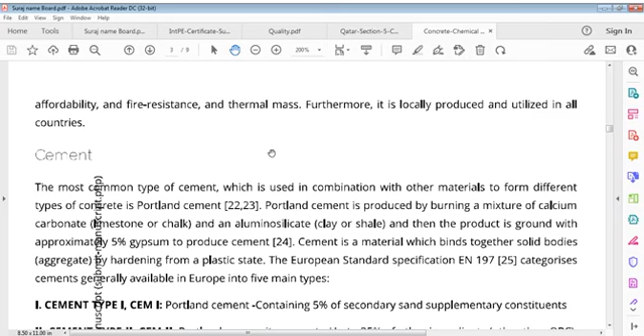Concrete is a very versatile material with important properties such as strength, durability, versatility, affordability, fire resistance, and thermal mass. Furthermore, it's locally produced and utilized in all countries.

The most common type of cement, which is used in combination with other materials to form different types of concrete, is Portland cement. Portland cement is produced by burning a mixture of calcium carbonate, limestone or chalk, and aluminosilicate clay or shale, and then the product is ground with approximately 5% gypsum to produce cement.

Cement is a material which binds together solid bodies, aggregate, by hardening from a plastic state. The European standard specification EN 197 categorizes cement generally available in Europe into 5 main types.

Cement type 1, that's CEM Portland cement, contains 5% secondary supplementary constituents. Cement type 2, Portland composite cement, contains up to 35% of other ingredients other than OPC, such as PFA or limestone.